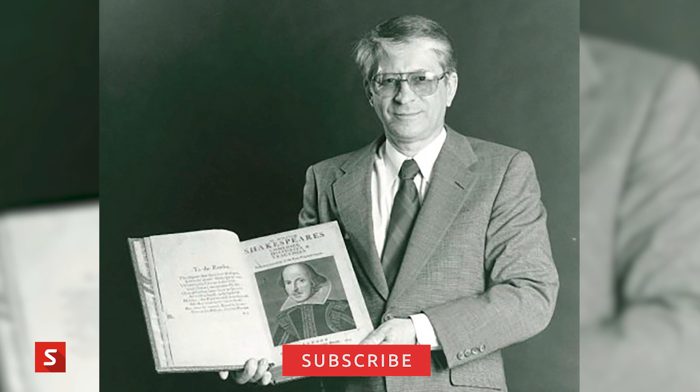The CAD industry actually goes back much further than my career, with the very first development started by Patrick Hanratty, known as the father of CAD-CAM, right back in 1957. This video is showing a demonstration of the first interactive CAD program, which was called Sketchpad. Developed at MIT in 1963, it used a light pen and an oscilloscope to create and edit geometry.

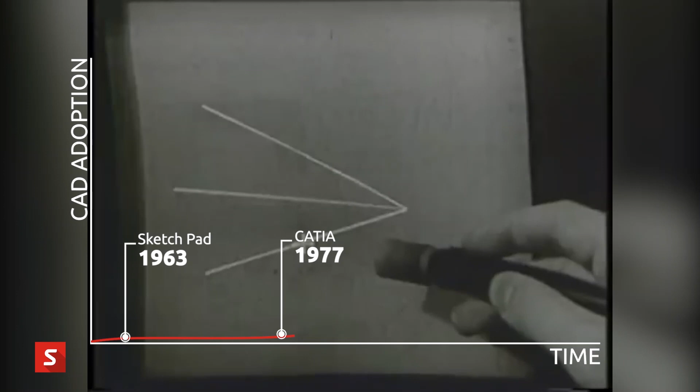The 1970s saw the start of 3D CAD, and in 1977 the release of CATIA, which stands for Computer-Aided Three-Dimensional Interactive Application. It started as an in-house development by the aircraft manufacturer Dassault to develop their Mirage fighter jet, and was later adopted by aerospace, automotive and shipbuilding industries amongst others.

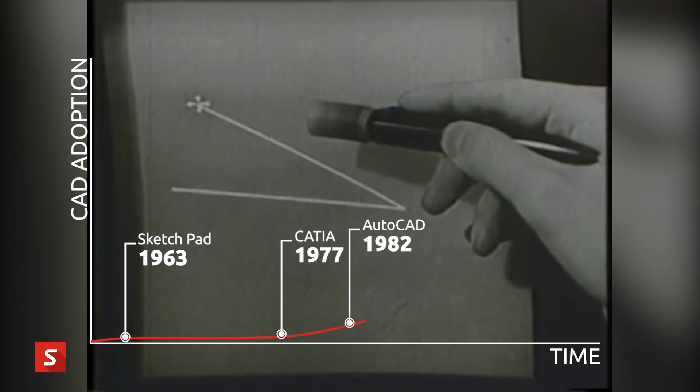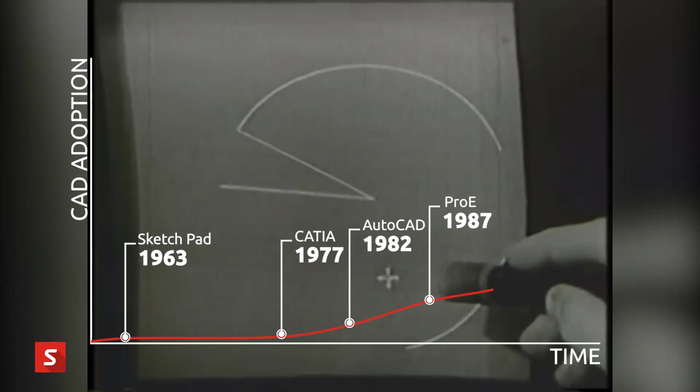The widespread adoption of CAD started in the 80s with the release of AutoCAD in 1982. However, this was still primarily 2D, and it wasn't until the release of Pro Engineer in 1987 that saw 3D become available to a wider audience. In the 90s, PCs finally became powerful enough to run 3D CAD applications, and in 1995 SOLIDWORKS was released, which was the catalyst for the mainstream adoption of 3D CAD.

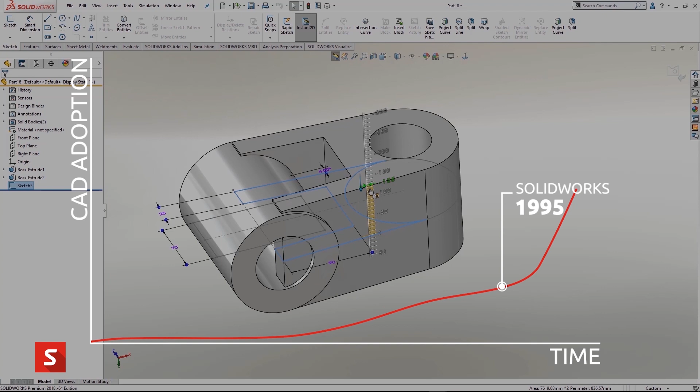Today, virtually every product that's manufactured will have been created in 3D CAD. There are free online packages. It's taught in secondary schools. For example, every secondary school in Ireland teaches children SOLIDWORKS. There's even software aimed at primary school aged kids. So 3D CAD has undoubtedly made it to the mainstream.

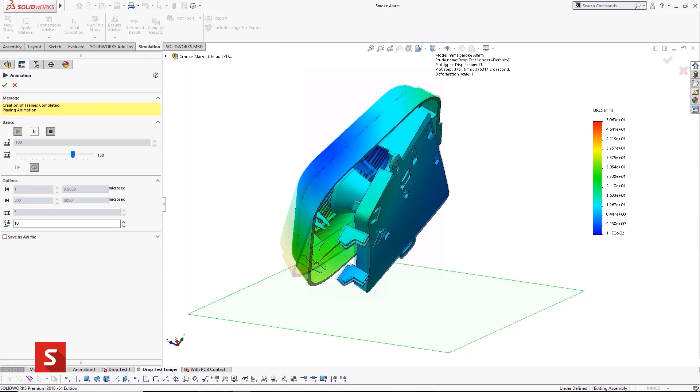But can we say the same for virtual testing or simulation software? Despite the fact that the development of FEA running on computers also dates back to the 60s, it's not yet become as widespread as 3D CAD. So what are the possible reasons why this is the case? Is it cost, ease of use, a lack of integration with existing design tools, or the perception that there's a need to employ an expert?

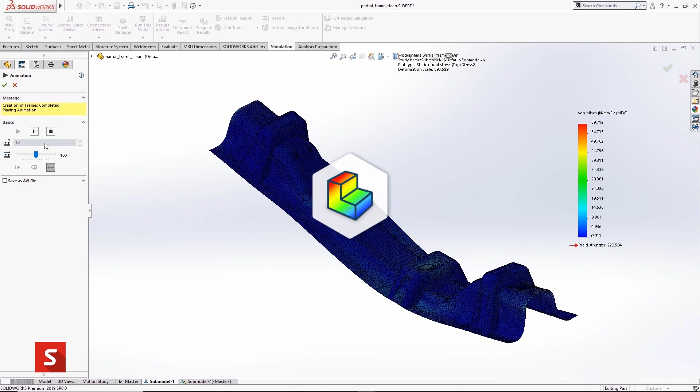In this video, we'll look at how SOLIDWORKS simulation solutions can address some of these concerns, and hopefully try to demystify simulation. The simulation products cover a range of different disciplines, from structural simulation, which typically looks at stresses and displacements in parts and assemblies under a range of different conditions, fluid dynamics, which looks at how models interact with liquids and gases, plastics to simulate the injection moulding process, and motion, which looks at the physics of moving assemblies. In this video, we're going to concentrate on the two most common areas of structural simulation and fluid dynamics.

All of these tools share the same core values in that they're easy to use and integrated within the design process. They're also able to work with each other, so we might use flow to calculate pressures or motion to calculate forces, which are then applied as loads in a structural simulation.

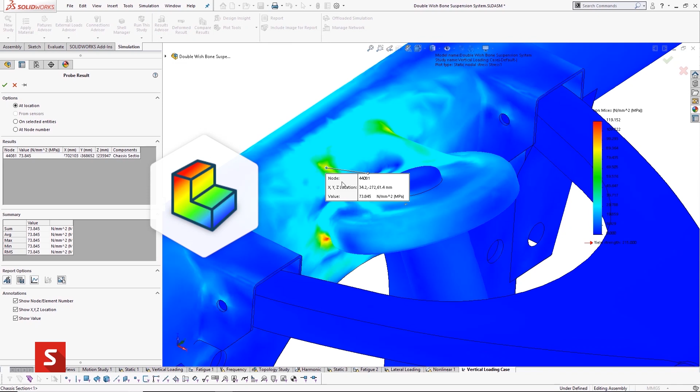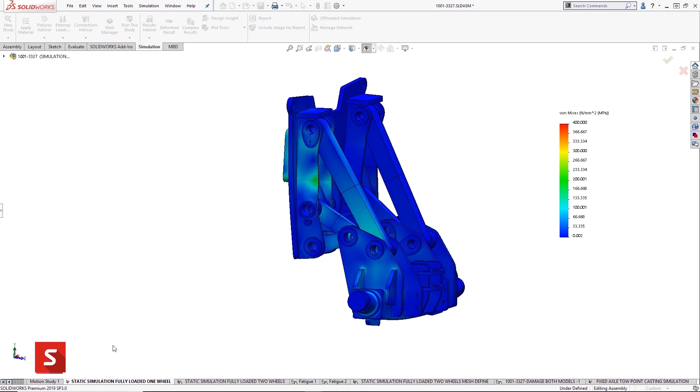Within structural, we have a wide range of different study types. Our loads can be static or dynamic. The material behaviour can be assumed to be linear like a metal or non-linear like rubber. We can also look at resonance, vibration, drop tests and many other scenarios. We can then optimise designs either through changing dimensions or changing the shape. We have customers using these tools in all industry sectors, from heavy industrial applications through to consumer goods.

One of these customers is Renthal, who are a global leader in the design and manufacture of components for motorbikes, cycles and all-terrain vehicles. They started manufacturing handlebars for motorbikes 50 years ago, and more recently in 2010 expanded into cycling products. Their components are now used at the very top of world sport, with over 200 motorsport world titles and 11 already in cycling.

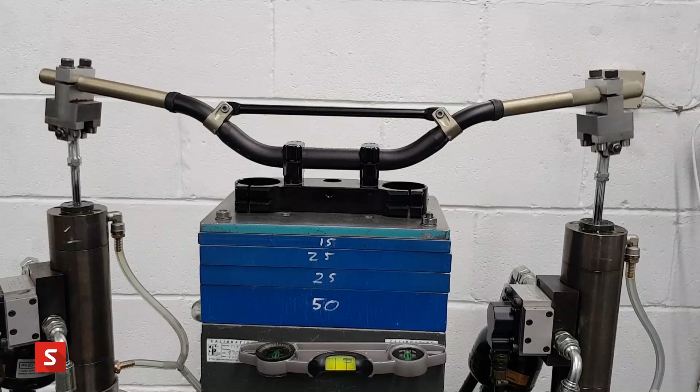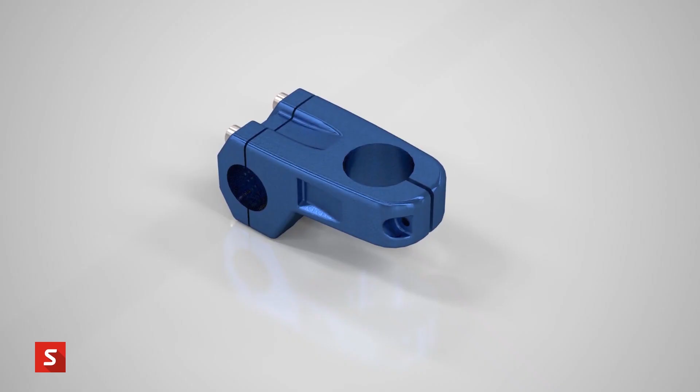All bikes and their components have to comply with the ISO standard 4210, which stipulates the tests that parts must pass. One such test that Renthal needed to simulate was the fatigue testing of handlebars and stems, as shown in this video. Being able to virtually simulate this test not only alleviates the time and costs involved in machining prototypes, but also means they could produce a better design that's stiffer and lighter with confidence that it would pass the test first time. In this example, we're going to replicate those tests using a BMX bike stem.

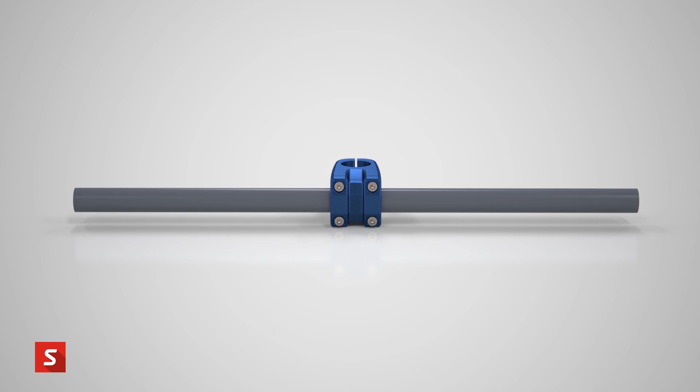The standard has different categories for different types of bikes, so we'll use the highest load for BMX. But it's still quite conservative, so we'll double the number of cycles and increase the loads by 50%. The test has two different elements: in-phase loading, where both sides are forced up and down together, or antiphase, where one is forced down and the other up. These are run as 200,000 cycles of each.

We typically start with a static study, and as we're only interested in the stem, we have replaced the handlebars with a test bar. Directly inside of the design environment, we can create our simulation study, which presents us with a list of items to consider.

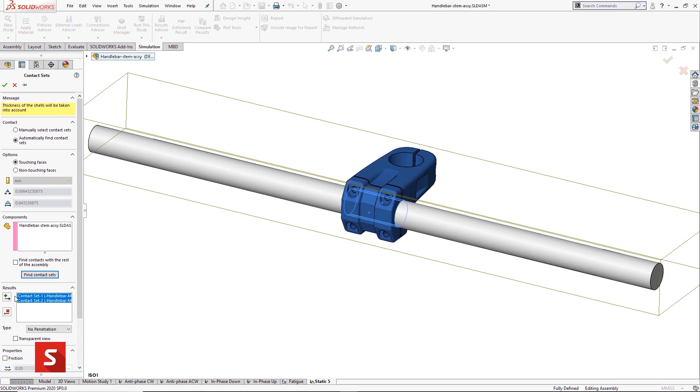First, we have the material, which has already been applied. Then we have the interaction between the various components, which will change from being bonded to allow the parts to slide and separate from each other. As we aren't including the steerer tube, we'll simply fix the back of the stem.

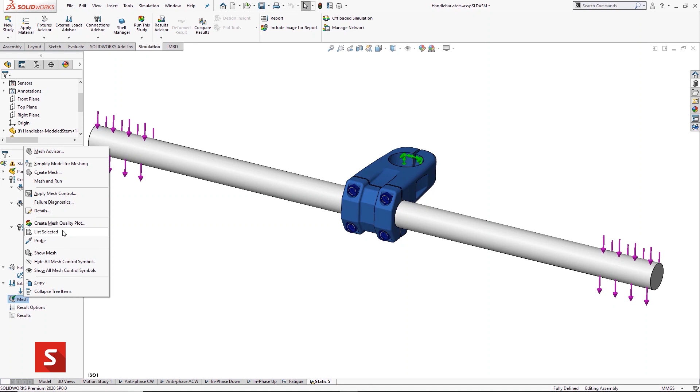We then apply our loads, and we'll start with the in-phase test with two forces acting in the same direction. Finally, we can include the effect of the bolts, including a preload as a torque, and then we simply mesh and solve our study. The default result plots are exaggerated to clearly show how the parts deflect, which we can change if desired. The initial results show us the stresses in the various parts.

To understand the implications of those stresses, we can look at the factor of safety, and by giving the areas that are carrying less load a different colour, it gives us some insight into the material we could safely remove if we wanted to make the part lighter without impacting the strength. As we're already in SOLIDWORKS, we can make quick changes and see how the factor of safety is affected. Because we've removed geometry that wasn't contributing to the strength, we can quickly reduce the weight without compromising the stiffness.

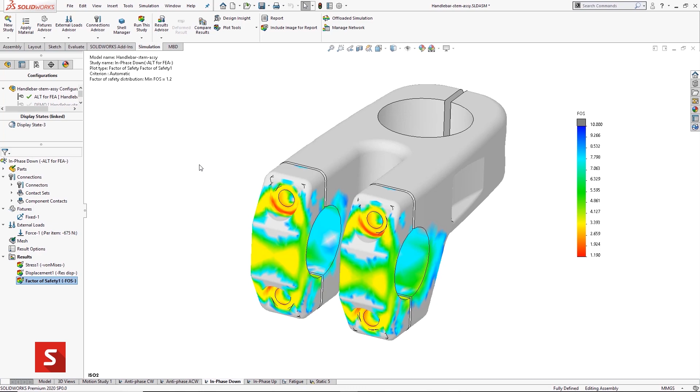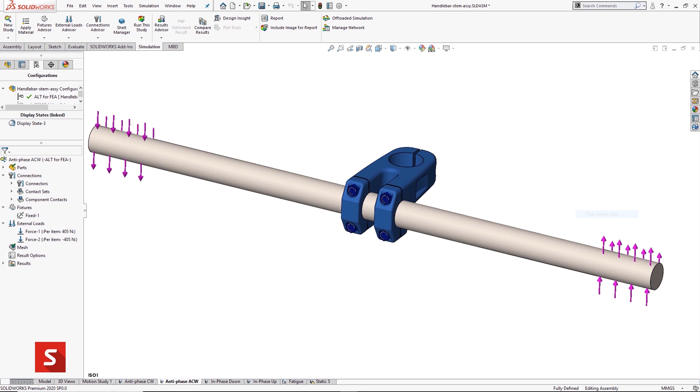Having finalised our design, we'll now move on to the fatigue test. With the inclusion of the bolts, which are a dead load, so not loosened and tightened with every cycle, we need to start with all four cases: up, down, clockwise and anti-clockwise. In the fatigue study, we can then alternate between two of these studies for each test, applying 200,000 cycles of each. The results then show us how much damage these cycles will have caused.

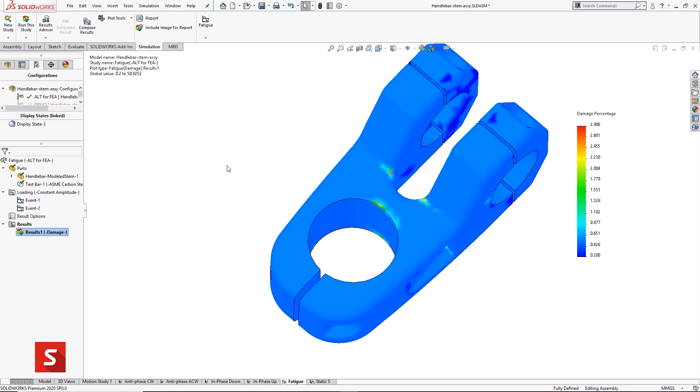The values represent a percentage of the life that the tests have consumed. In this case, 3% shows that our design would easily survive those 400,000 cycles, and if we continued for many more, where the cracks are likely to develop. That has shown how simulation can help validate and also guide the design of an existing component, but it can also create brand new geometry through topological optimization.

Here we're trying to create a brand new design for a mountain bike stem. We've built in some basic parameters such as an 80mm reach and a 6° rise, along with locations for clamping around the tube and bars. Other than that, we've just modelled a maximum space envelope. We can then apply all four load cases from the previous example.

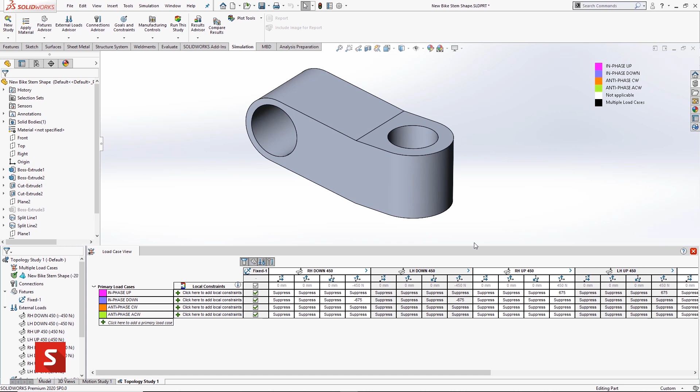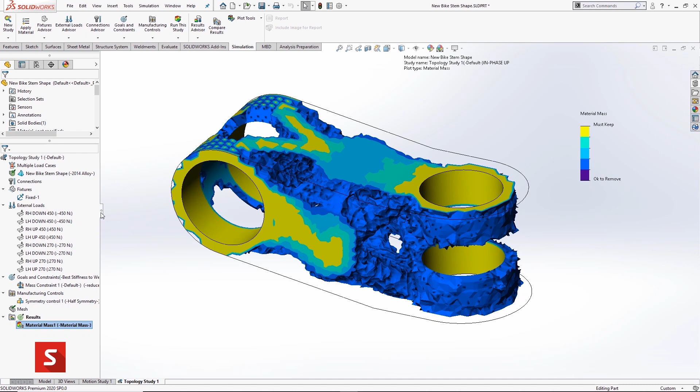We want to produce a shape with the maximum stiffness to weight ratio, and can also include some constraints such as symmetry and retaining some geometry around the clamps. The results can be quite striking and very different from conventional designs. We can smooth this result and potentially create a part directly using additive manufacturing, or use it as a graphical guide to create a brand new optimal design.

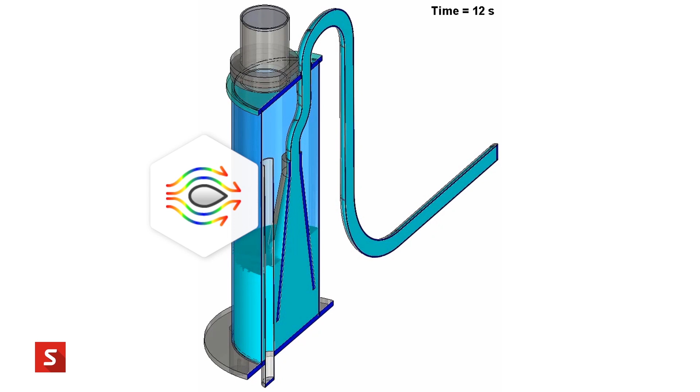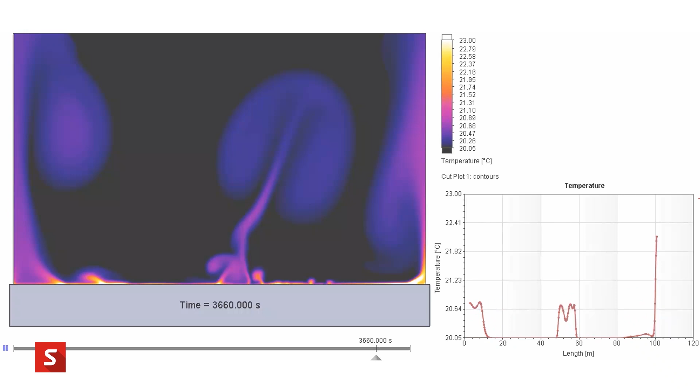We'll now move on to SOLIDWORKS Flow Simulation, which is a general purpose fluid dynamics application that can solve the majority of fluid related problems. They can be internal, like fluid flowing through a flow control device, or external, like drag on a vehicle or convection from a hot surface. It covers all modes of heat transfer. We can simulate how fluids mix, or more complex problems like rotating geometry, free surfaces like water filling or sloshing in a tank, or highly viscous liquids like blood or oil.

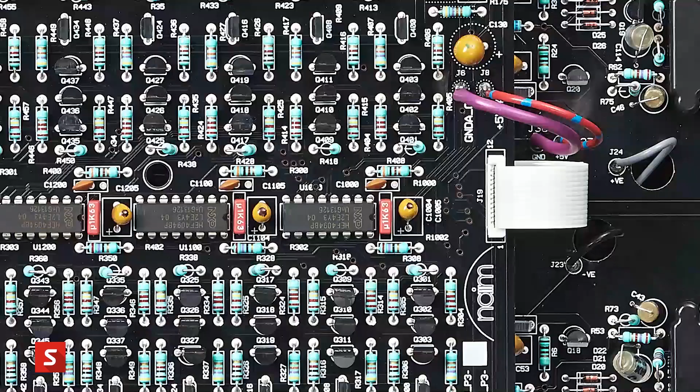Flow simulation is again used in a wide variety of industries. One of the fastest growing areas is in electronics. As devices become more powerful and at the same time smaller, the challenge of keeping them cool is increasingly difficult. One example is Naim Audio, the British hi-fi manufacturer. They were founded in 1973 by Julian Vereker, a racing driver, entrepreneur and self-taught engineer. Dissatisfied with the quality of his home audio system, he decided to build his own. Naim have since gone on to win numerous Queen's Awards and have built a reputation for quality.

In 2014, they launched their groundbreaking Statement amplifier. Using fans to keep electronics cool can have a detrimental impact on sound quality, so they used flow simulation to ensure that the electronics could be kept cool without using the fans in all but the most extreme conditions. Due to the costly components, building prototypes was very expensive and time-consuming, so flow simulation was able to ensure that they got the design right first time.

We'll use this small electronics device to look at how we can use flow simulation to predict and visualize the fluid and thermal behavior inside this assembly. We'll look at having fans inside the box or directly mounted to the case, and whether we can improve the performance of the heatsink. Again, all of the setup is done inside SOLIDWORKS, which starts by defining the air inlets.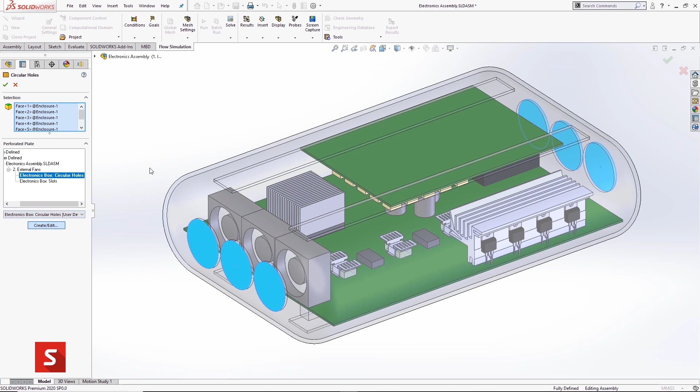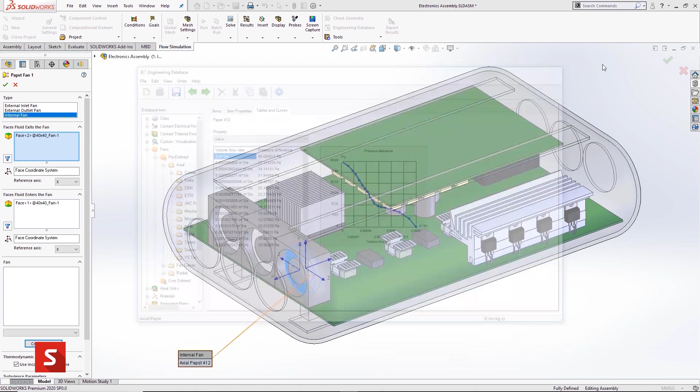If there are slots or hole patterns on the vents, you can easily account for these without the need for the geometric complexity, reducing computation time. You just need to specify a couple of parameters for the hole pattern. The fans can be specified from a large built-in commercial library or specified manually. Heat sources for the electronics components are specified. Flow also includes the ability to accurately model semiconductor heat transfer, such as for this CPU. It provides a wide range of visualization tools to gain insight into the fluid behavior inside the model.

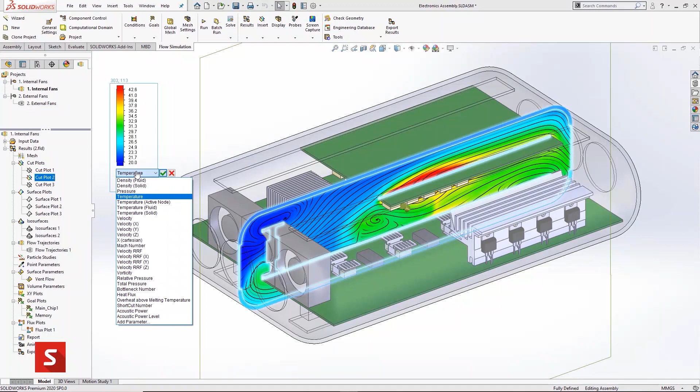Section plots allow you to look at a cross-section of the model at any location and select for a wide range of characteristics such as velocity, pressure or temperature. A surface plot on the heatsink provides a clear view of the temperature distribution, making it easy to identify uneven cooling and potential hotspots.

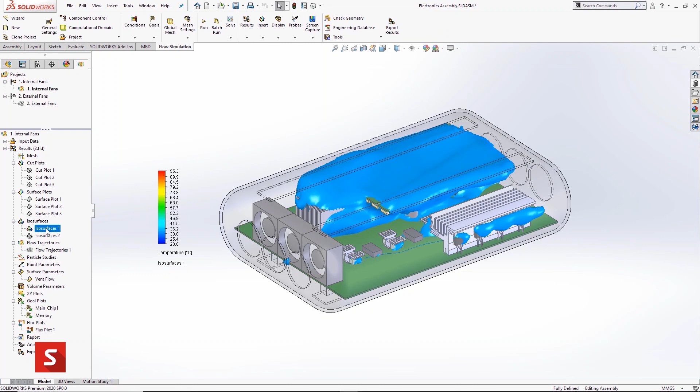Isosurfaces are used to show the result of the same magnitude in the design, such as air temperature. You can also show numerous values at the same time, and by making them transparent, it's a great way of visualizing the flow behavior in 3D throughout the whole model.

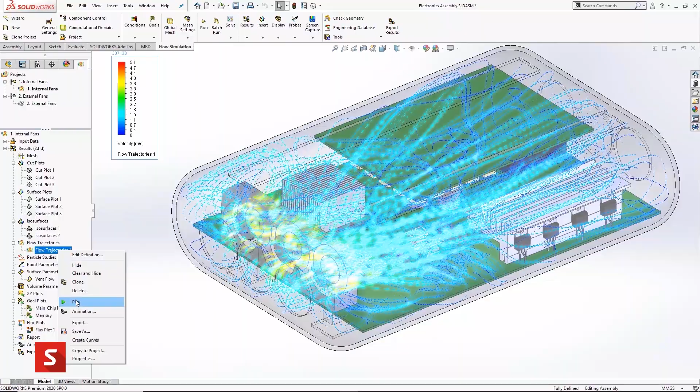Flow trajectories are another great way of visualizing the flow in 3D, allowing you to see far more than you would in any real experiment. With the ability to animate results and interact with the model, you gain great understanding on product performance.

It's sometimes difficult to understand how heat moves around in an assembly. The heat flux plot can show us what is happening visually. We can look at the whole model, or just select certain parts, in this case the main CPU. We can see that a tiny amount of the heat is convected directly, 2.7 watts goes into the PCB, and the majority through the heatsink and out into the air.

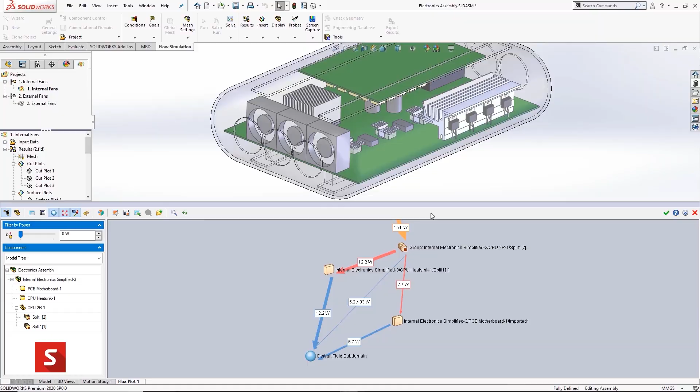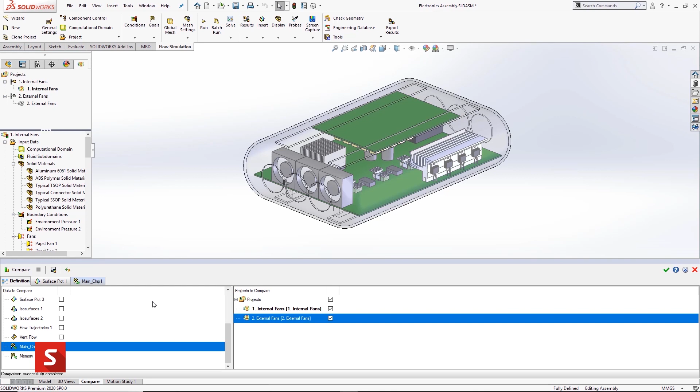The Compare tool allows us to easily compare the different design concepts and select the best option to move forward with. You can select from both graphical and numerical results, which we can then compare side by side. It then loads each result set, captures the desired information and collates it into images and tables for quick and easy review.

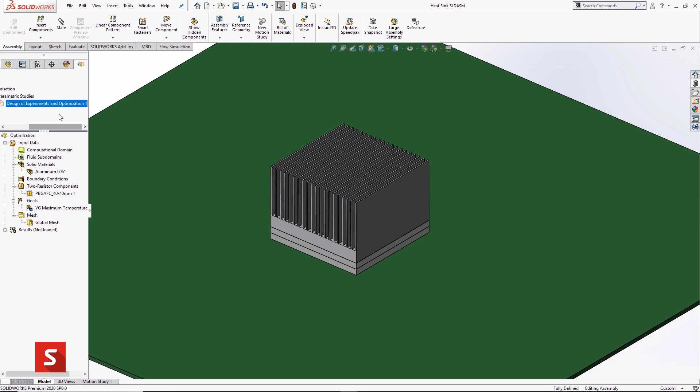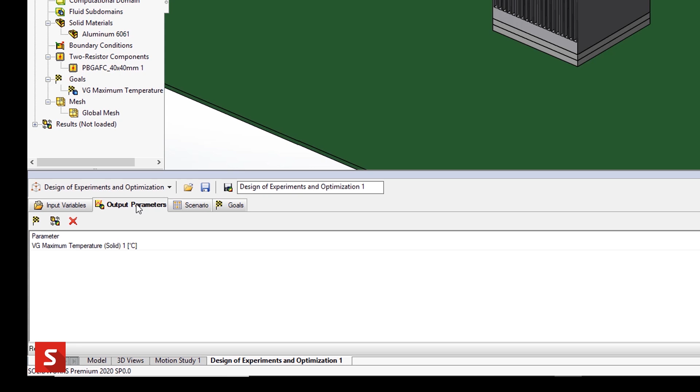We've taken the chip and heatsink in isolation to speed up the calculations. Using the Design of Experiments tool, we can specify a number of parameters to vary. Here we've chosen the number and thickness of the fins. Select the goal we want to optimize, in this case minimizing the temperature of the chip, and then simply specify the number of experiments we'd like to run.

From those results, flow simulation can predict what the optimal values would be. We can also visualize the results on a 3D surface, as we might be able to identify an alternative result that's nearly as good, but cheaper to manufacture.

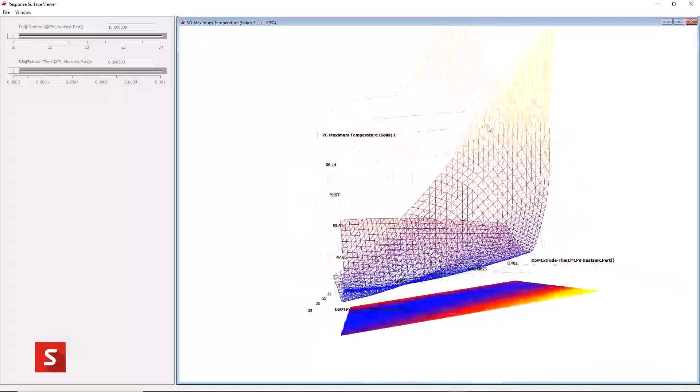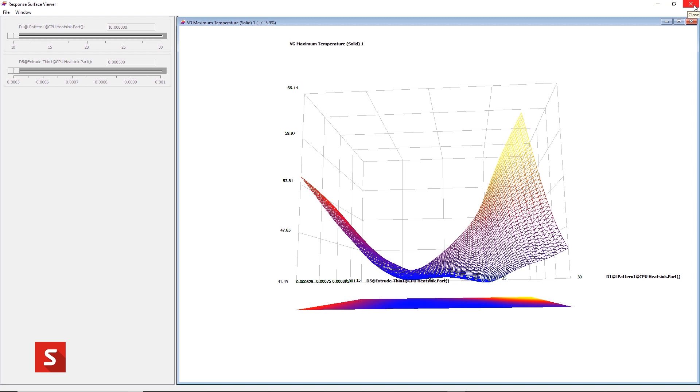Conventional thinking would suggest we just need to maximize the surface area, but if we make the channels too narrow, the flow velocity is reducing, preventing the heat from being moved. This plot shows us where the sweet spots are with the best compromise between those parameters.

We've seen how we can solve a wide range of relatively complex problems simply inside of the SOLIDWORKS environment, but occasionally there are challenges that go beyond its capabilities. In those circumstances, we now have a solution that allows us to use the most capable simulation tool available directly from within SOLIDWORKS, and crucially maintain links to the CAD geometry should it change. It's called Structural Professional Engineer and is built on Abaqus, an incredibly powerful, robust and fast simulation solver.

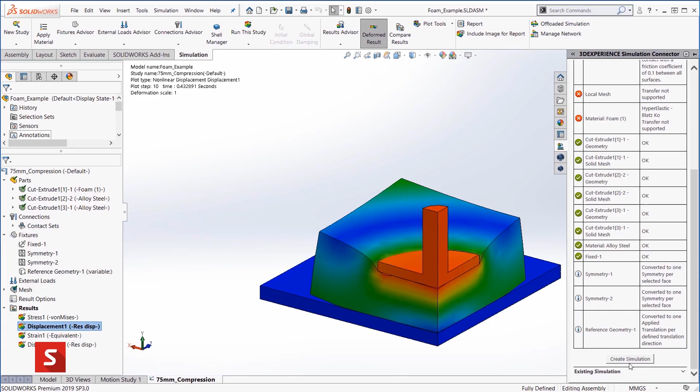In this example, we want to study a very large compression of a complex nonlinear material. We can do our setup in SOLIDWORKS and then transfer the geometry and boundary conditions directly to Simulia. We have access to more material models. Here we'll choose a hyperfoam.

We could use the mesh from SOLIDWORKS, but we might have more success with a different type of element. So we'll swap the foam and plate to a hex mesh.

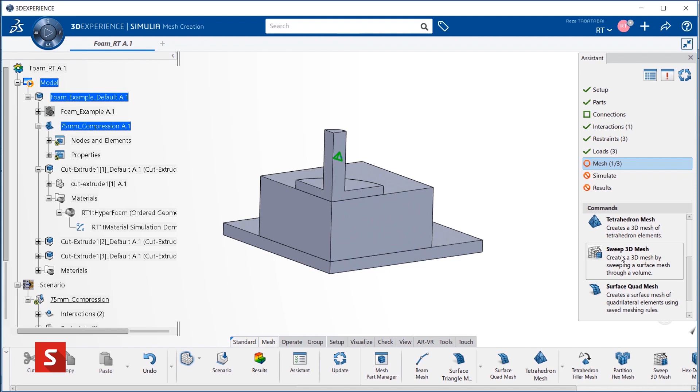With those changes quickly made, we can now run the simulation. We can choose to run it locally, but also have access to more computing power in the cloud if we need faster results. And very quickly, Simulia is able to complete the compression of this foam.

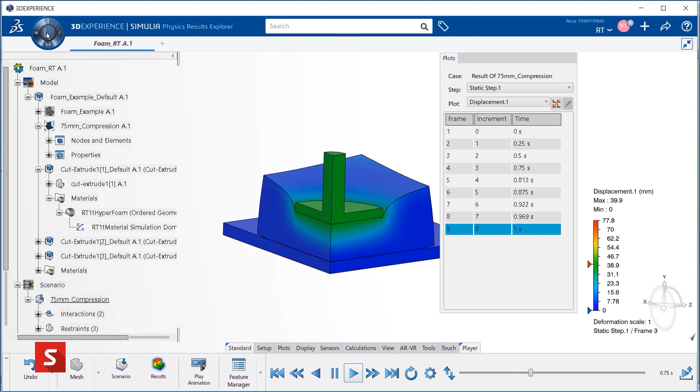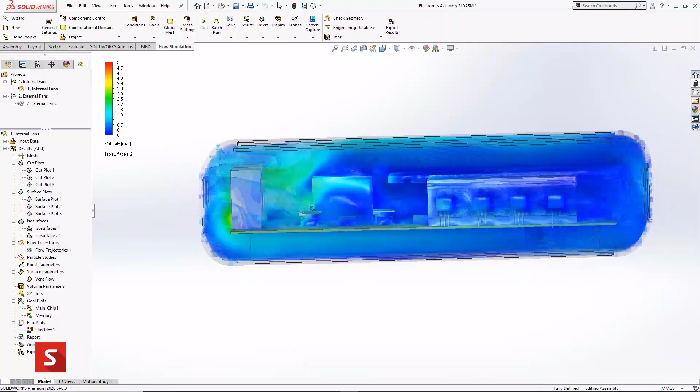If we were to change the geometry back in SOLIDWORKS, we could directly update the geometry and just rerun the simulation. In conclusion, we've seen how SOLIDWORKS simulation tools can solve a wide range of design problems. Being integrated in the design environment makes it familiar and easy to use, and provides insight into the implications of design changes, or alternatively drive the design through optimization.

We then saw that if we have extremely complex problems that exceed the capabilities of SOLIDWORKS simulation, that we still have an integrated and easy to use alternative. I hope that I've demonstrated that simulation tools can become an integrated part of the design process as we move towards wider adoption, and have helped to demystify simulation.